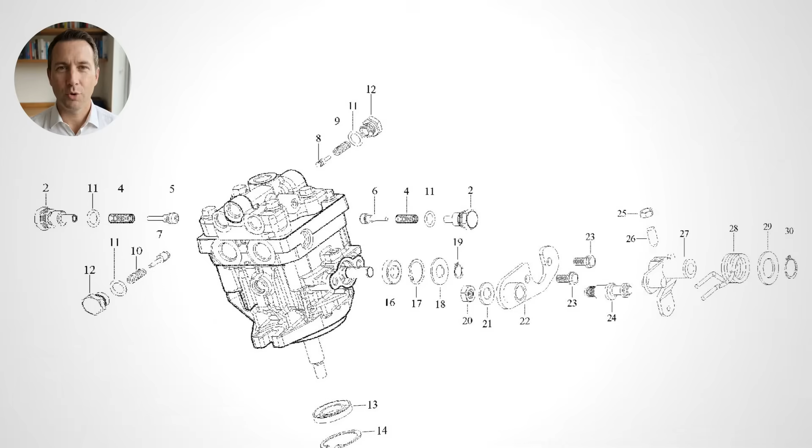I spent an embarrassing number of hours reading through lawn site forums, tractor repair threads, and Tuff Torq's own spec sheets to find out which mowers on the showroom floor right now are the worst offenders. These are the 5 riding mowers you need to walk past, and I am going to tell you exactly why.

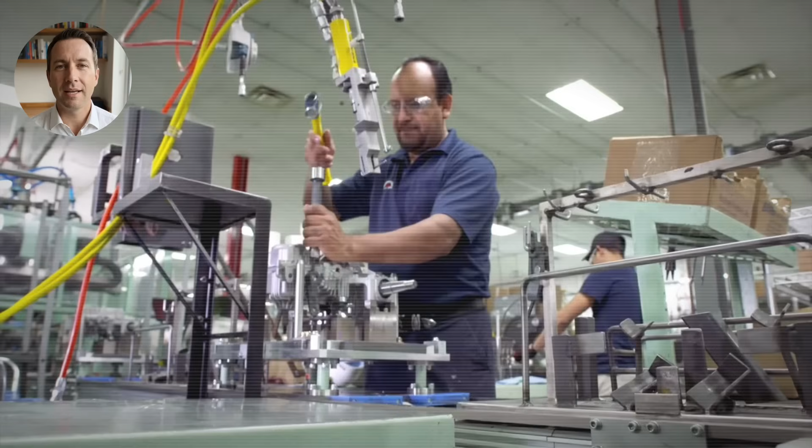Before we get into the list, you need to understand one component, because it explains everything. The Tuff Torq K46 is the most widely used hydrostatic transmission in the lawn tractor industry. It comes in dozens of variants, and it is inside almost every entry-level mower on the market, regardless of the logo on the hood. The K46 was designed for light-duty mowing on flat ground.

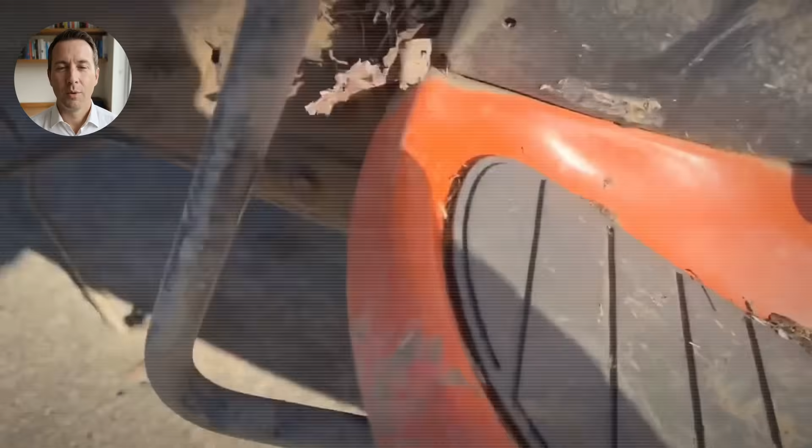It was not designed to haul attachments, handle steep hills, or run more than a few hundred hours without slipping. The cylinder walls inside the pump score over time. Oil gets thin when hot, and the unit starts losing torque on even gentle slopes. Repair forums are full of owners reporting the same story. Works great for 2 seasons, then one afternoon it just stops pulling uphill. Replacement cost runs between $800 and $1,200 installed, which is often half the price of the mower itself.

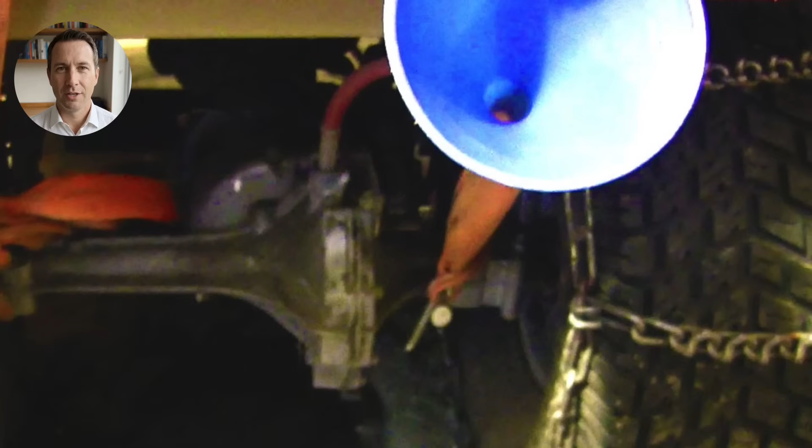Now here is the detail that everyone misses at the time. Most of these transmissions ship from the factory filled with conventional 10W-30 oil, not synthetic, because synthetic costs more. And on many models, the K46 is sealed from the factory with no drain plugs. You literally cannot change the fluid without pulling the entire unit off the machine.

Cheap oil, no service access, and a transmission that overheats under load. That is not a design flaw. That is a cost-cutting decision. Now let me walk you through the 5 worst offenders sitting on the showroom floor right now.

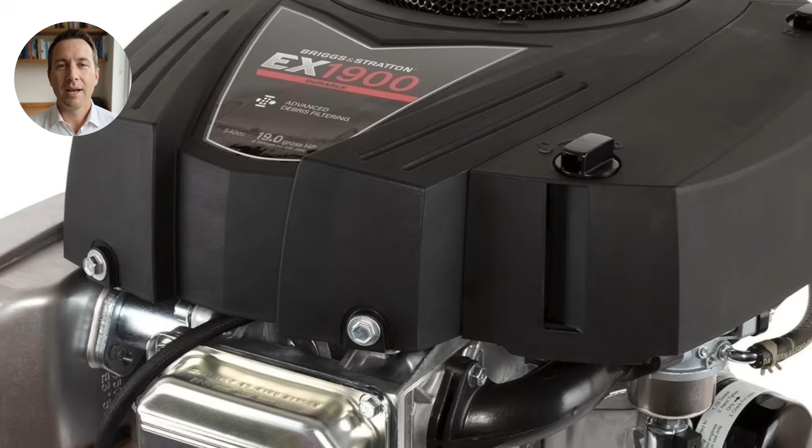Number 1. The Troy-Bilt Pony 42. You will find this lawn tractor at Home Depot and Lowe's with a price tag around $1,800, which makes it one of the cheapest riding mowers in the aisle. It runs a Briggs and Stratton Intek 540cc single-cylinder engine, and that engine has a well-documented head gasket problem. The forums all say the same thing.

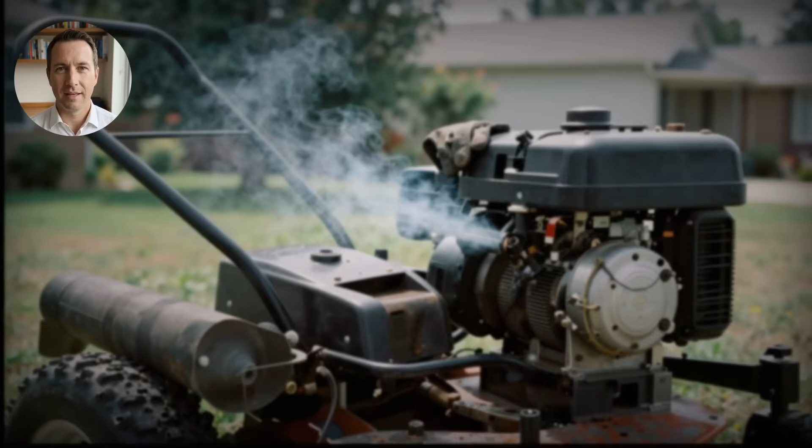The fiber head gasket has no fire ring, and cylinder pressure eventually blows it out, usually somewhere between 120 and 200 hours. You get oil spraying all over the frame, blue smoke out the exhaust, and a mower that suddenly will not hold RPMs. A shop will charge you $200 to $300 to fix it, and most small engine mechanics will tell you to expect it to happen again.

Underneath that engine sits a K46 transmission and a stamped steel 14-gauge mowing deck. Troy-Bilt carries a 1.1 star rating on Consumer Affairs with over 600 reviews. And I am not making that up.

Number 2, the Craftsman T110. Here's where it gets interesting. This mower is built in the same MTD factory in Valley City, Ohio that builds the Troy-Bilt Pony. Stanley Black and Decker bought MTD in 2021 for $1.6 billion, and that acquisition put Cub Cadet, Troy-Bilt, Craftsman, and several other brands under one corporate roof.

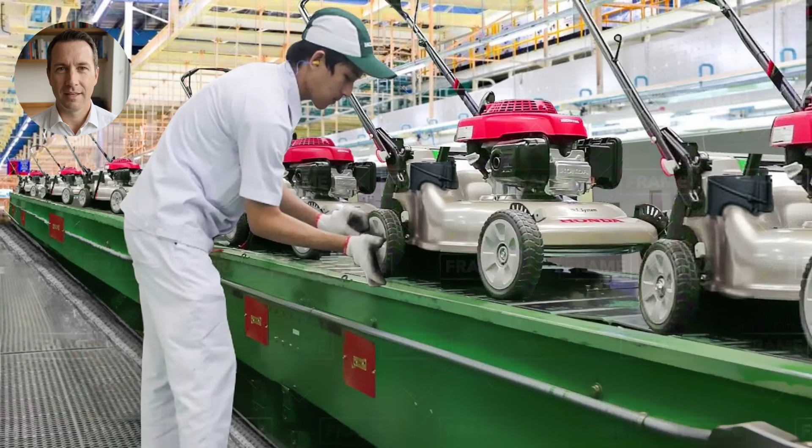The Craftsman T110 uses the same Briggs single-cylinder engine, the same K46 variant transmission, and the same stamped deck platform as the Pony. About 80% of the parts are interchangeable between these two machines. Same factory, same assembly line, different sticker on the hood.

The T110 typically costs $50 to $100 more than the Pony, and you are getting nothing for that premium except a red paint job and the Craftsman name, which your dad trusted, but which Sears no longer even owns.

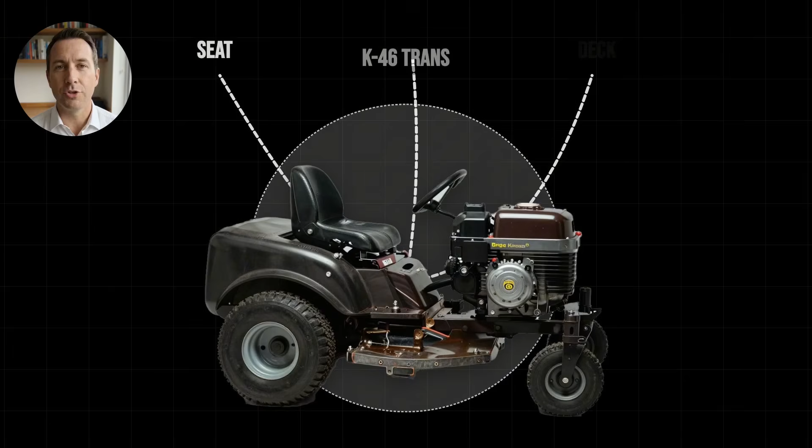Number 3, the Murray MT100. This is the mower Home Depot sells as its absolute entry-level option, usually priced around $1,600. Murray was bought out of bankruptcy by Briggs and Stratton back in 2005, and the brand has been a budget-tier afterthought ever since. The MT100 uses a Briggs Intek single-cylinder, paired with one of the lightest-duty transmission variants in the

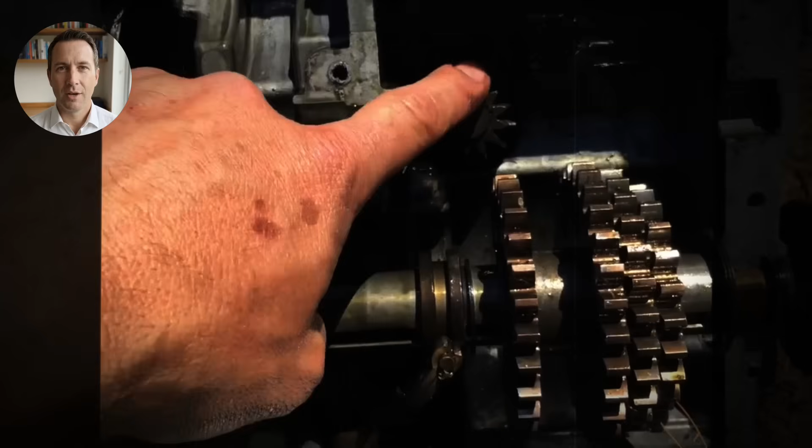K46 family. The mowing deck is stamped, the seat is thin, and the build quality is what you would expect from the cheapest riding mower on the sales floor. On the Consumer Affairs website, Murray carries some of the lowest ratings in the entire category. If you're going to spend $1,600, I would rather see you buy a good used mower from a dealer with a known service history than a brand new Murray that may not survive its third season.

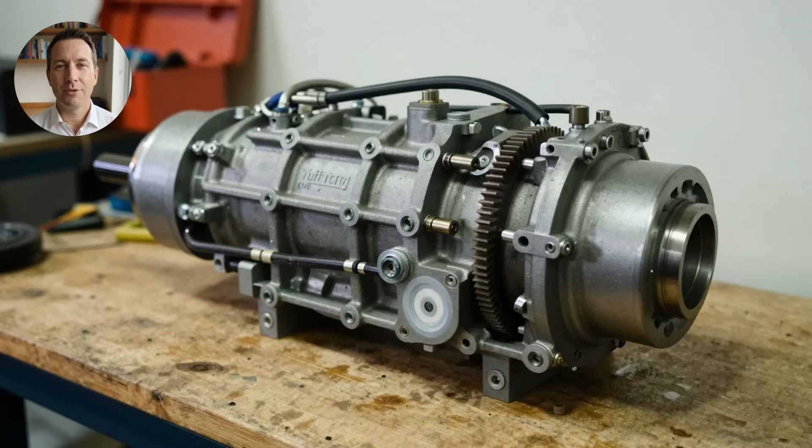Number 4. The Cub Cadet XT1 LT42. This is the one that really frustrates me because Cub Cadet charges a premium for what is essentially the same core platform. The XT1 LT42 runs around $2,400, sometimes higher depending on the retailer, and it uses the same K46 transmission family that is inside the Troy-Bilt Pony at $1,800.

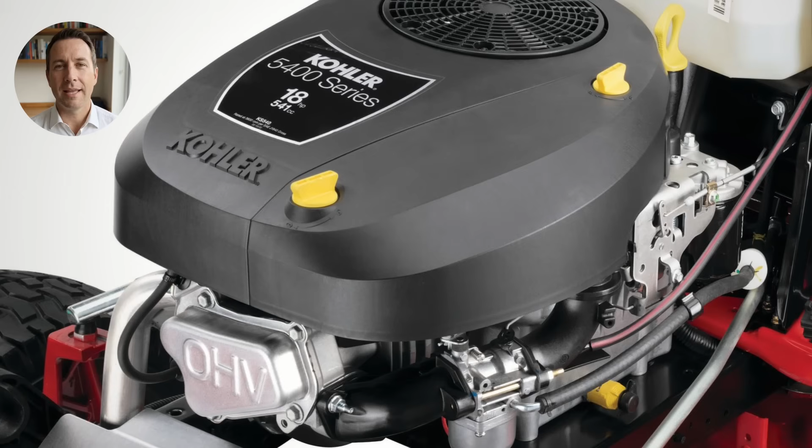The engine is a Kohler 5400 series, which is a step up from the Briggs Intek in terms of head gasket reliability, so I will give it that. But the transmission is still the weak link, and the mowing deck is still stamped steel. International Harvester started the Cub Cadet line in 1961 as a genuinely premium product. The old Cubs from the 1970s and 80s were built like small tractors with cast iron components and gear-driven transmissions. The machines sitting in the Lowe's aisle today share that heritage in name only.

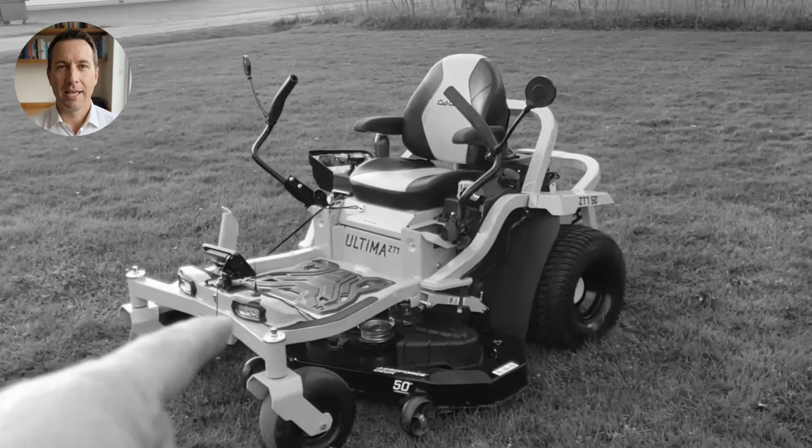Cub Cadet is now an MTD brand owned by Stanley Black and Decker, and the XT1 is built on the same cost-optimized platform as everything else in the MTD family. You are paying $600 more than the Pony for a better engine and better brand perception, but the component most likely to fail on you is identical.

The S100 starts around $2,400 and it uses a Tuff Torq TLT200 transaxle, which is a variant in the K46 family. The engine is a Briggs and Stratton 17.5 horsepower single cylinder with the same head gasket tendencies I already described. The deck is 42-inch stamped steel, and the warranty is 2 years or 120 hours, whichever comes first. If you mow 2 acres every week during a 7-month season, you will blow through 120 hours in roughly 2 years. That means your warranty expires right around the time the transmission starts showing its age.

John Deere dealers will tell you the 100 series is their entry-level consumer line, and that the real Deere experience starts at the X300 series. That is true. But the floor associate at Lowe's is not going to explain that distinction. They are going to point you at the green and yellow paint and let the logo do the selling.

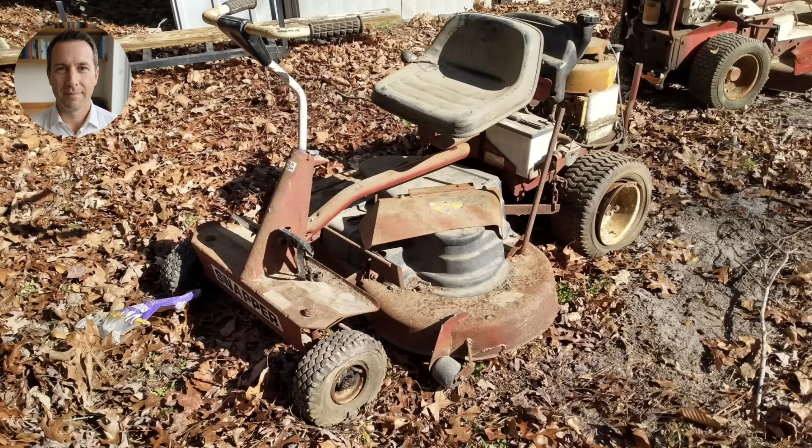So what should you actually do? Here is the honest answer. If your budget is under $2,000, buy a Troy-Bilt Pony or the Craftsman equivalent. Accept that you're buying a disposable machine and plan on 5 to 7 years of service before something major fails. Change the engine oil every 25 hours, keep the cooling fins clean, and do not ask it to pull heavy loads or mow steep hills.

If your budget is between $2,500 and $4,000, skip the big box store entirely and go to a dealer. Look at the Husqvarna TS series with the Kawasaki FR engine, or the John Deere X300 line with the K58 or K62 transmission. Those transmissions are serviceable, the engines run cooler, and the dealer relationship means someone will actually stand behind the warranty. The price at the dealer is often the same MSRP as the big box. You just get better support after the sale.

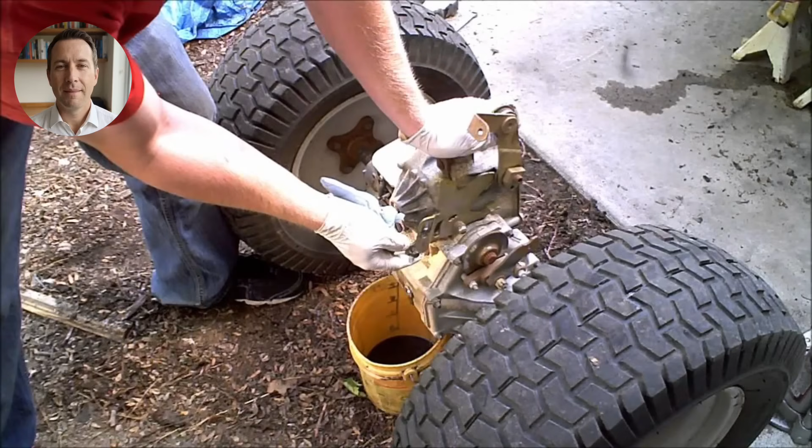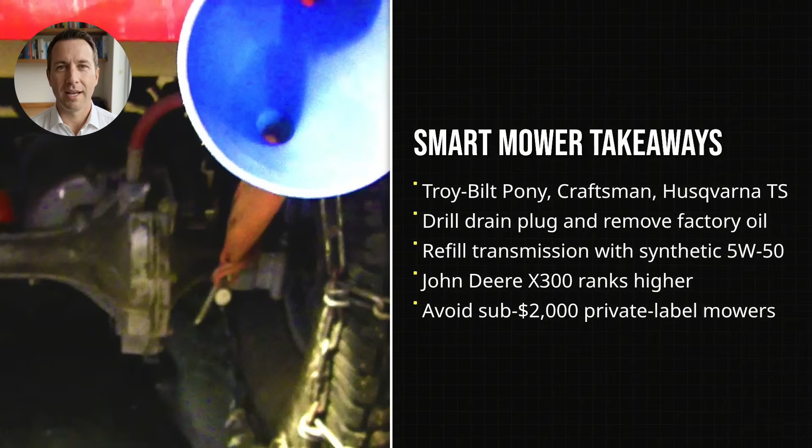And here's your parting tip, because this is the most valuable 30 seconds of the entire video. If you already own a mower with a K46 transmission, you can extend its life dramatically by doing one thing. Drill a drain plug into the transmission case, drain the factory oil, and refill it with synthetic 5W-50. Tuff Torq's own tech support recommends synthetic. The factory just does not fill it that way because conventional oil is cheaper.

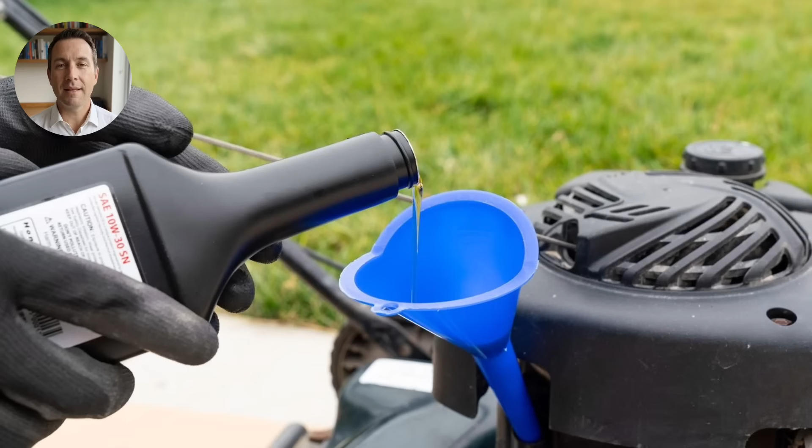A $20 oil change could double the life of an $800 transmission. The forums are full of people who have done this at 100 hours and gotten another 500 hours out of the unit. That is the kind of information that nobody at the store is going to tell you.